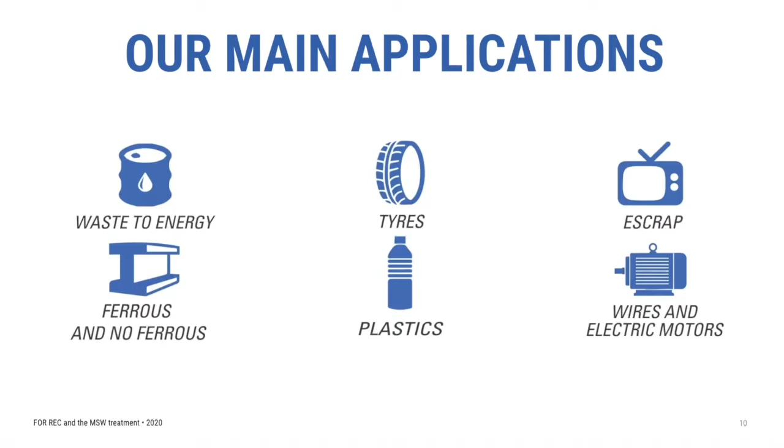We deal with waste to energy, which is the webinar session of today. We deal with ferrous and non-ferrous recycling business, tires waste, plastic, e-scrap, wires and electric motors - all the scrap present in the world, except demolition and construction waste.

Today's topic is the specific treatment of MSW, Municipal Solid Waste, in a processing system to obtain RDF from that waste. The aim of treatment is mainly to separate and recover quality recyclable materials and achieve energetic valorization of the dry, not recyclable fraction, which is called RDF, refuse derived fuel.

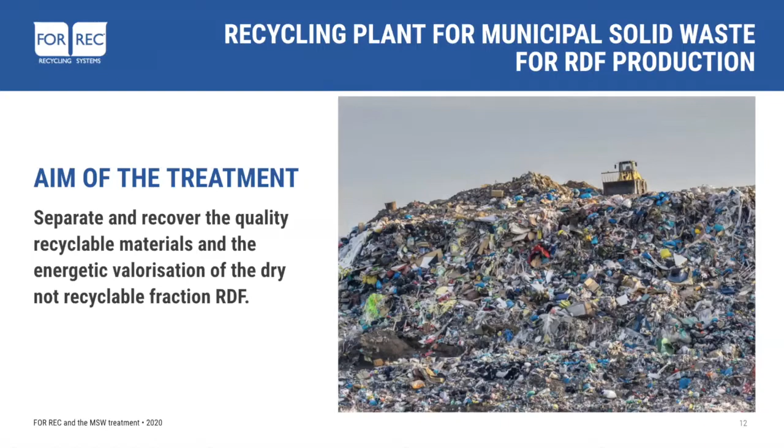The in-feed material, MSW (Municipal Solid Waste), has a double option of recovery. It can be sorted, so you can recover different downstream materials - especially plastic bottles, film, glass, paper - and go into the reselling market with your materials. Or you can go directly to RDF, an alternative combustible for cement kilns or electric energy production. That's why RDF, if well separated from foreign content like the organic fraction, can be used as an alternative combustible.

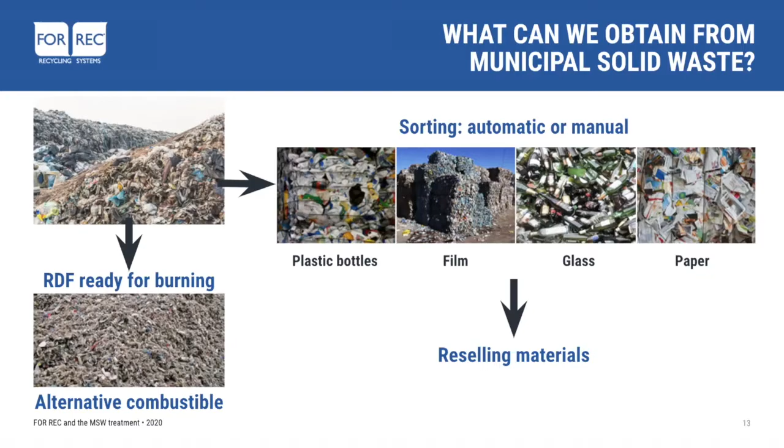The main machines at the beginning of the line - in principle, there are several options. One of them is the bag opener, which we call LS, the first machine in the line. Its main aim is to open all the bags coming from the sorting.

This machine has no sieve, so it's able to process high quantities of material, and is ideal for opening all the bags and waste in bags to prepare the waste for the following sorting, whether manual or automatic.

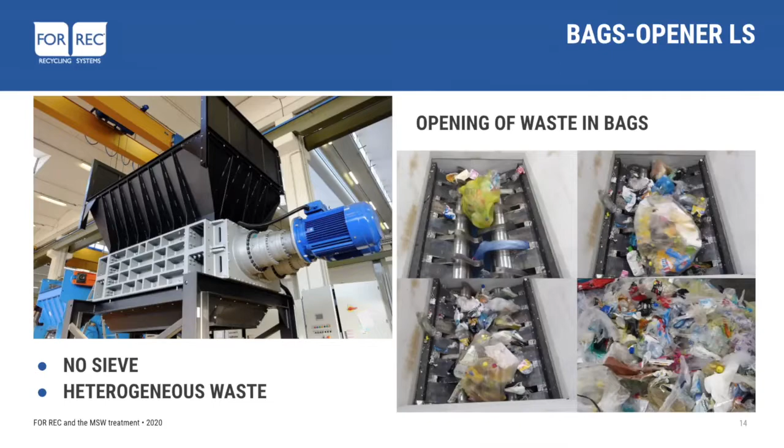It has a proper cutting system, manufactured through a particularly designed blade. It has a heavy-duty structure and heavy-duty shaft, gearbox and motor, trying to minimize the risk of foreign bodies impacting the cutting system.

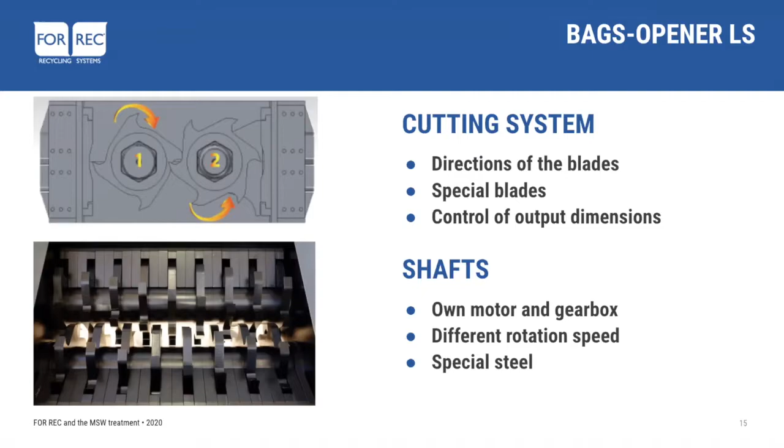Each shaft has its own gearbox and motor. The shafts have different RPM (revolutions per minute), driven through an inverter. Blade holders and shafts are made of special steel with thermal hardening to reduce wear. Blades have a special profile to allow opening and tearing of the bags without damaging the content. We have the possibility to increase the distance of the blades and change the shaft revolution to control the output material dimension.

Another option for our customers is the primary shredder multi-crusher FR, which sits at the beginning of the RDF installation. Honestly, this machine has huge sales - we are very satisfied with its behavior because it's really a flexible machine.

It can allow loading of a huge quantity of not only municipal solid waste, but even bulky waste and other commercial and industrial waste, for instance. Thanks to a large hopper and a patented cutting system, the loader and crane can load the hopper of this machine in a very comfortable way, speeding up the first part of the installation in terms of municipal solid waste preparation.

So it's a machine that is really heavy duty. The capacity of this machine is estimated at up to 100 tons per hour of municipal solid waste. The output size is controlled by a cutting table underneath, which can be set according to customer wishes and demands.

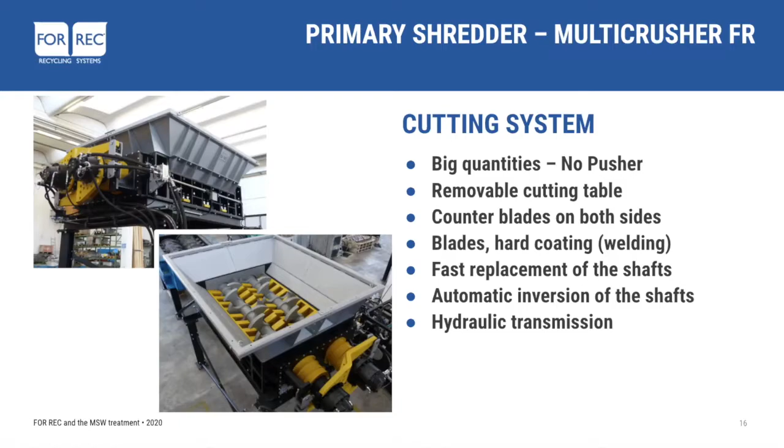Let's make a step ahead in the installation, where FOR REC can provide different sorting options.

So after the first machine we were discussing before, which is the LS or the FR, we used to have different kinds of sorting. It can be manual, automatic, or semi-automatic, depending on the budget and the project details. So here are the options of different sorting methods.

The first one, in the case of unsorted MSW, is represented by a disc sieve for separating the organic fraction. This is a completely heavy-duty disc sieve, avoiding twisting of material between the discs, thanks to a conical or pipe anti-twisting device, and can separate the organic fraction from the rest of the municipal solid waste according to dimension. The size of this machine is highly customized and normally settled based on project details, capacity, and the organic content inside your municipal solid waste.

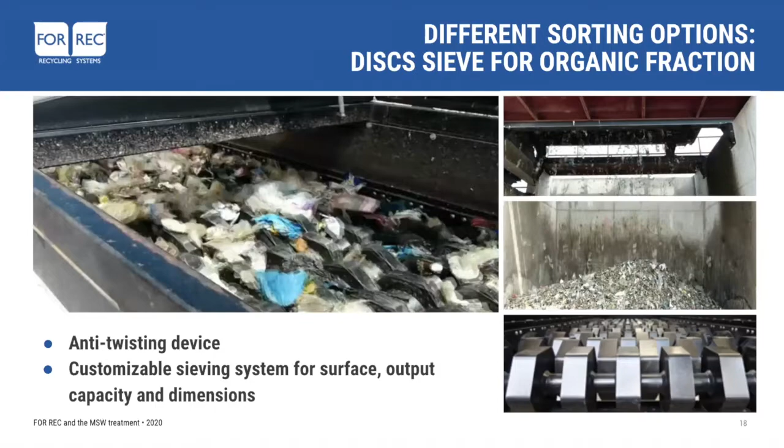So as I told you before, the different kinds of sorting after the primary shredder and after the disc sieve, where the organic fraction is already sorted, can go through manual sorting, semi-automatic sorting, or fully automatic sorting. The manual sorting is made simply with a sorting platform where the operator collects the different kinds of materials according to a negative or a positive concept of sorting.

The cabin might be supplied with an air conditioning system or heating system according to the rules of the country, or even according to the environmental conditions. The semi-automatic line is, let's say, a mix between the automatic one plus some options, for instance magnets, eddy current separators, wind sifters, or whatever.

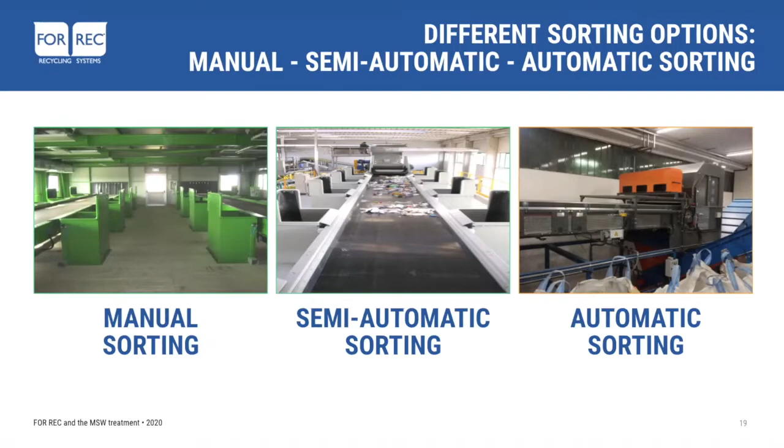And the fully automatic line uses machines for the sorting, like optical sorters, as you can see in the pictures.

At the end, in order to guarantee as much as we can the final RDF, we usually install a wind sifter, which is a machine that divides the heavy fraction from the light fraction, where the light fraction is the good part, the part that is then addressed to the cement or electricity preparation, while the heavy part is the foreign body that we have to erase entirely.

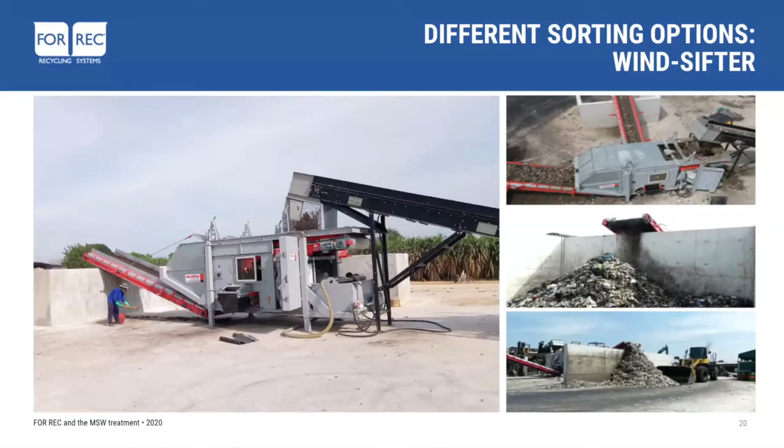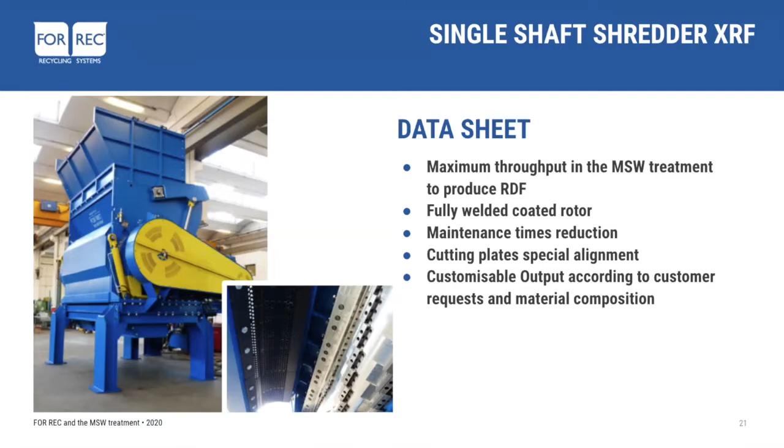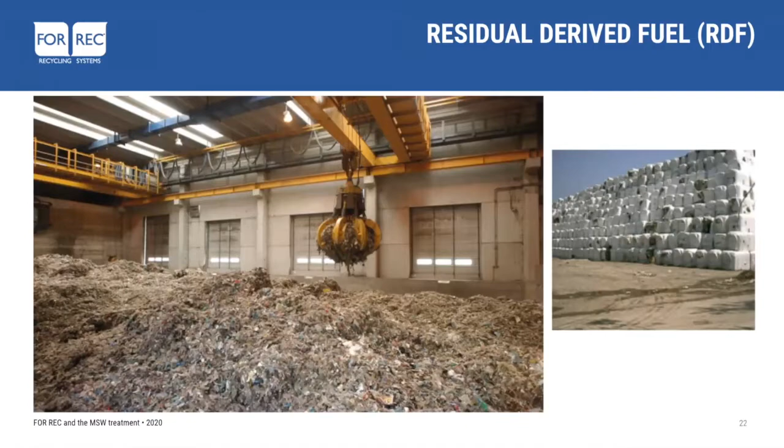Here are some nice pictures of the RDF that could be stored in a wide area or even baled for easy transport. Some pictures of some cases, existing customers I'm talking about.

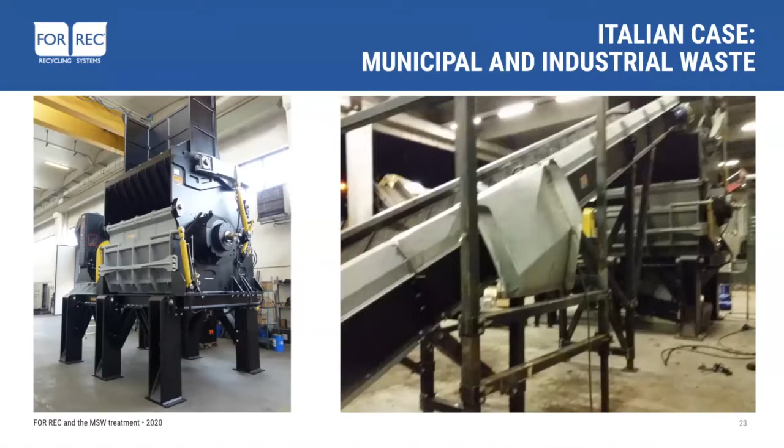So this is one of the Italian cases. This customer is making RDF by treating municipal and industrial waste. So he has both downstreams, let's say. He has municipal solid waste, but he also has industrial waste.

This is the Far East case where recently, I'm talking about more than 4 years ago, we placed between 4 and 5 lines, mainly dedicated to landfill remediation and further RDF production.

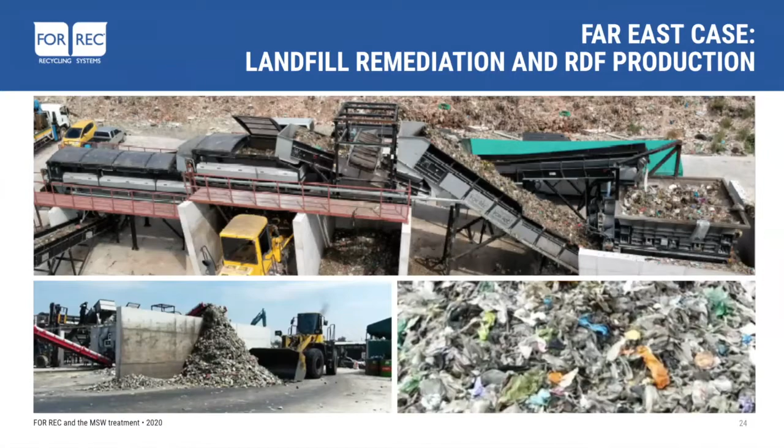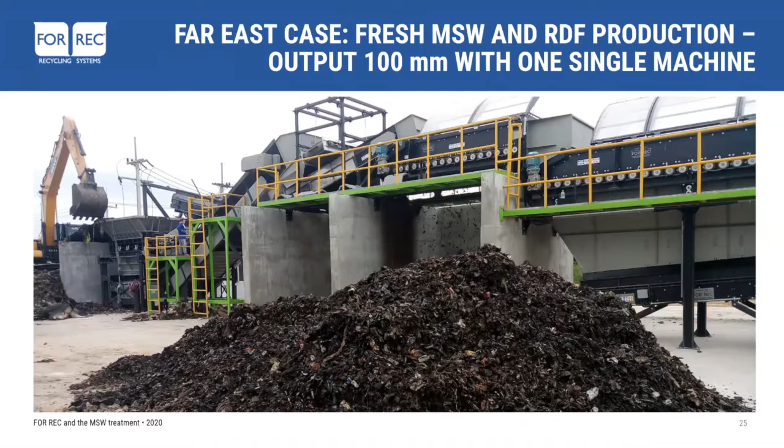This is an installation, also in the Far East, where from fresh MSW, not from old or landfill waste but from fresh waste, we are producing RDF with an output of 100 millimeters using one single machine and removing more than 50% of organic content.

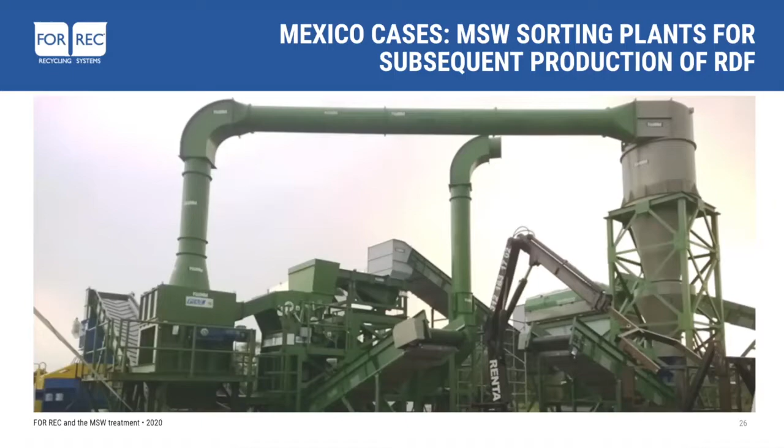That's another case in a South American country, Mexico, where we placed 7 installations for the separation of the municipal solid waste, mainly into 2 downstreams: one to separate what is not burnable from what is burnable.

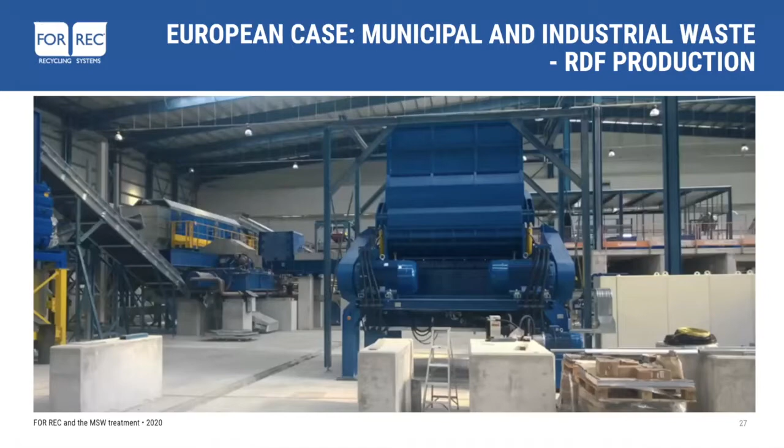So I've given you a short, brief, and hopefully clear explanation of this kind of installation. And as I repeat, we don't have a standard, since the municipal solid waste we handle in South America is completely different from the municipal solid waste we find in the Far East. There couldn't be one single solution; it needs to be properly studied, especially in the shredding and preparation concept.